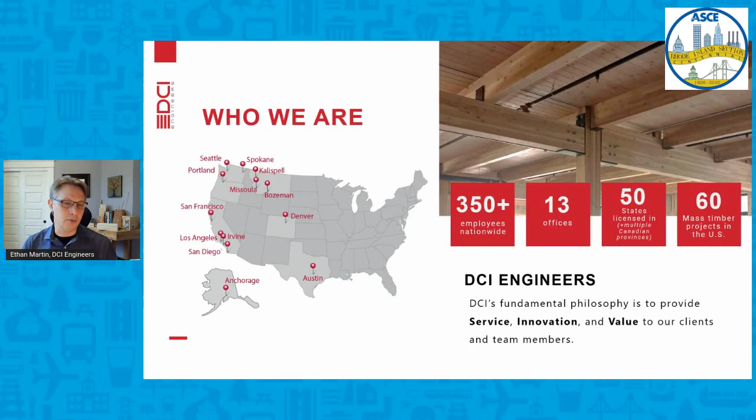All right, thanks, Jeff. As Jeff mentioned, I started a lot of wood buildings and things like that, and we'll talk on that. But right now, I am at DCI Engineers, and we're starting a mass timber division, balancing what DCI has already done over the years. We've got about 350 employees and 13 offices, mainly West Coast and Midwest. We are doing some projects in the Northeast, a project in South Korea, and we're actually doing 11 of these new tall Type 4 mass timber buildings. So we'll touch on that.

And I will apologize that this presentation, funny enough, is difficult: to cover carbon and wood, then life cycle assessment, and then the tall wood buildings. That's a lot to put in an hour. So I'm going to be running at about 100 miles an hour, but feel free to ask questions, or wait till the end to ask questions.

My background is structural engineer. I had my own company designing a lot of wood buildings, then went to work for the wood industry to promote wood construction. I come at that from a sustainability standpoint, and I'm the one that started these tall mass timber buildings. I set up a prescriptive performance-based process through the governor's office here in Oregon that had a guaranteed building permit. The idea was a developer would be incentivized because they could spend this time and effort and know they were going to get a building, not spend all this time on a prototype building and have the building department say no at the end. So the guaranteed building permit was really critical.

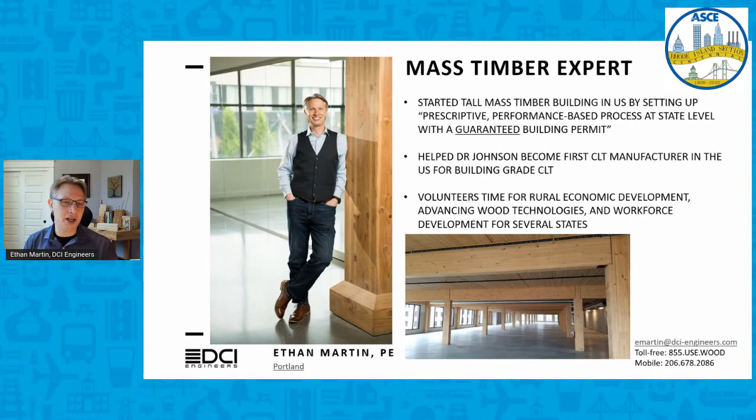And then I helped D.R. Johnson become the first manufacturer of CLT for buildings, and we'll talk about what CLT is in a minute. That was also through the governor's office. So definitely a sustainability person, definitely interested in wood and mass timber. And we're going to try and cram this all into an hour here.

The difference between mass timber and light frame construction is that mass timber maintains its internal temperature in a fire event. It's got such a large volume of timber versus surface area that it chars versus rapidly combusting like light frame construction. So it's predictable, it maintains its shape, and it's a really different animal in fire design than light frame construction.

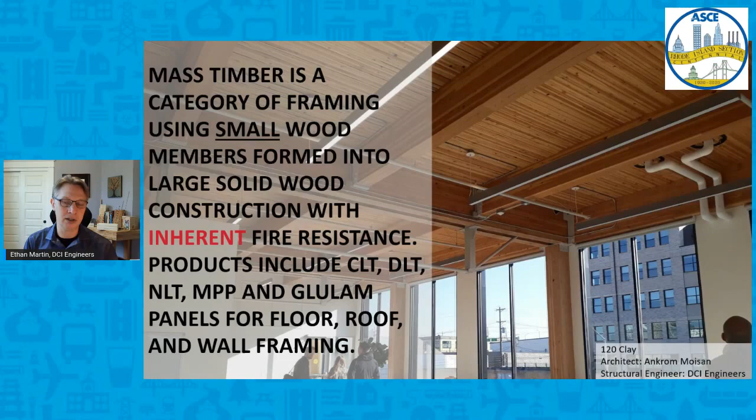We'll talk about CLT and DLT. CLT is cross-laminated timber, DLT is dowel-laminated timber, NLT is nail-laminated timber, MPP is mass plywood panels, and obviously you've seen lots of glulams also. So there's a lot of products that fall into mass timber, as long as you get that large volume of timber versus surface area that predictably chars. We'll talk about some of the sizing of that later on.

So why wood? The tree takes carbon dioxide out of the atmosphere while it takes in sunlight and pulls up nutrients and water out of the ground to form that cell, to form that lignin. 50% of that wood fiber is carbon.

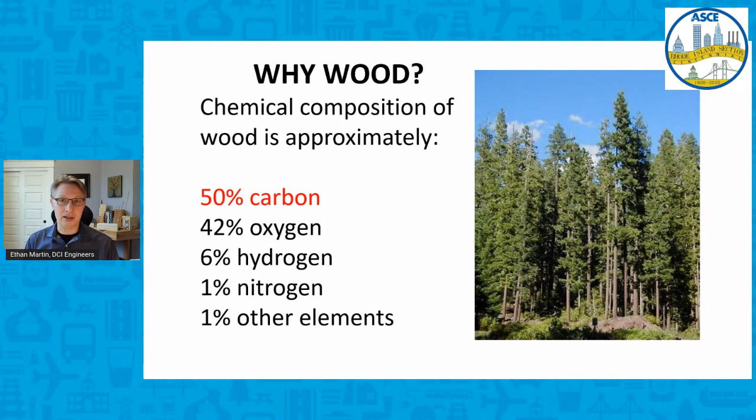So to grow that tree, it is removing carbon dioxide and taking that carbon and forming the wood cell and then releasing oxygen, O2. So wood basically is a carbon sink. And we'll talk about why some people want to look at the growth of trees being a carbon sink and

some don't. But what we've got to look at as structural engineers is that the manufacture of the building materials that go into our buildings, right now, is about 11% of our total global greenhouse gas emissions. And obviously you guys have probably seen the political stuff going on with our new president and getting back into the Paris Climate Accord agreement. And basically that's trying to minimize the temperature rise across the planet. And obviously global greenhouse gas emissions play a critical role in that.

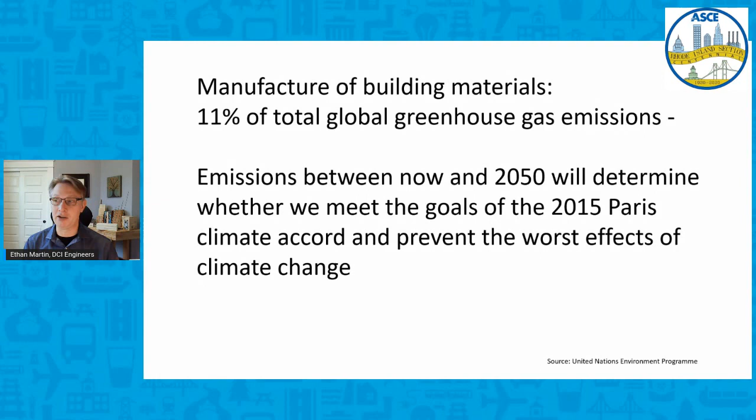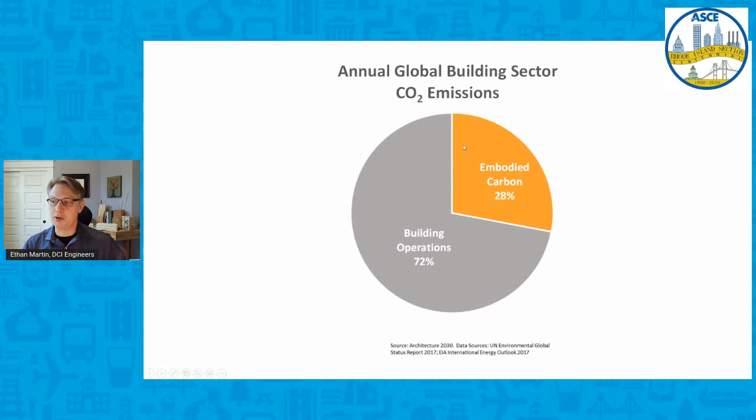So where we've been, this is a more recent chart here, basically of 2017. And really we've been focused on operational carbon. That's the AIA 2030 challenge, focused on the building operations. And so you'll see this is as of 2017. Even back in about 2014, building operations was about 84% of the carbon dioxide emissions. And so even just between 2014 and 2017, this has dropped from 84 down to 72. And thus, obviously, embodied carbon starts to play a bigger and bigger role.

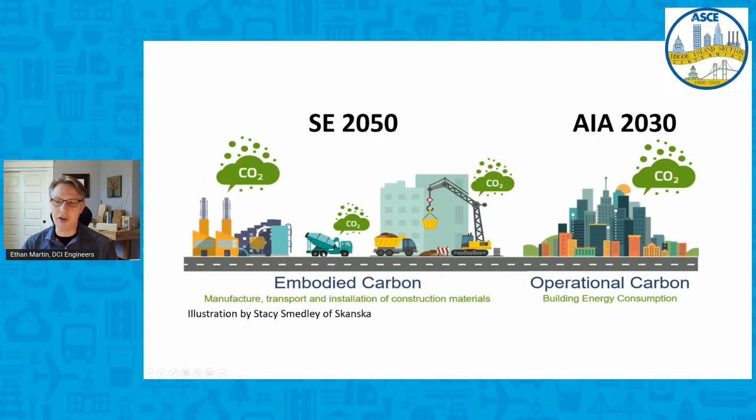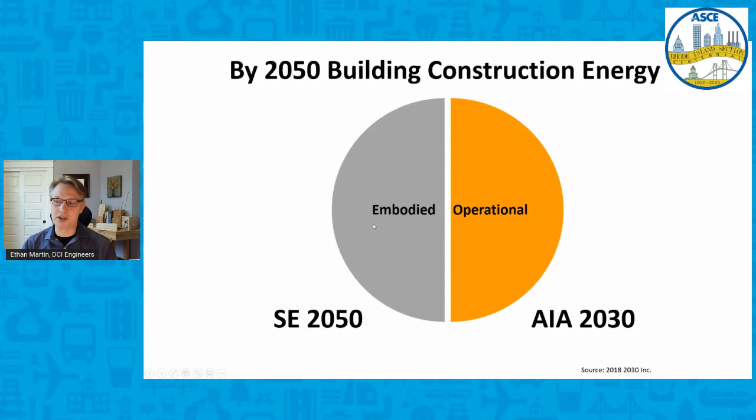So again, AIA 2030 has really been focused on the operational energy. The new SE 2050 challenge for structural engineers is really how do we reduce our embodied carbon? How do we reduce the material impact going into the building? And if we meet this challenge, the idea is by 2050, 50% of your carbon dioxide pollution will be from the operational energy, the AIA 2030, and 50% of the building carbon dioxide pollution will be from the embodied energy. That's the intention there. And so what does that mean in real life?

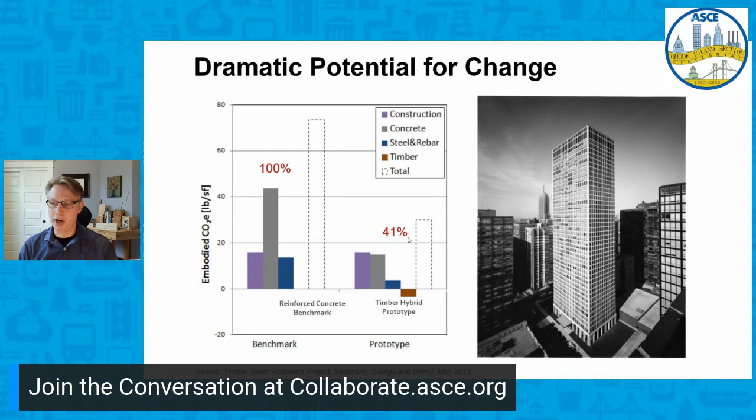And this is not even considering third-party certified wood. This is just using wood. And so the deal here is to keep an eye on this. This is 41% just using wood. You use a third-party certified wood from a managed forestry program, and this actually dropped down to about 16%. So it's a significant impact that we can make by changing building materials.

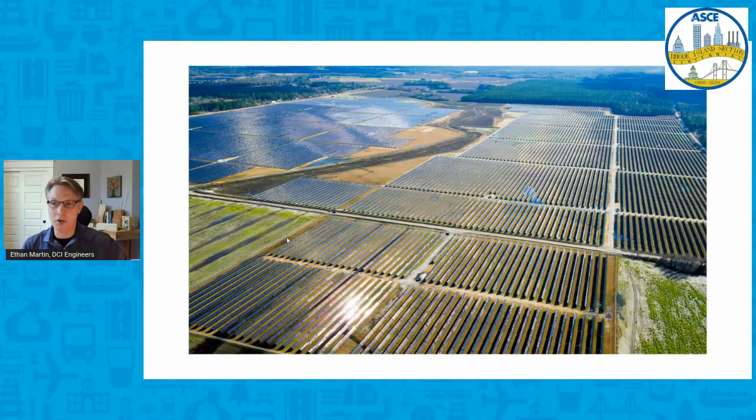We are talking about a crop where we cut down the trees, we replant the trees, and you just keep a crop rotation going, just like a farm. You grow the corn, you cut the corn down, you replant the corn, you grow the corn, you cut it down. And trees are very similar. We're just on a much larger harvesting cycle of about 50 years-ish.

And so here's some of the devastating facts that you're seeing. In North America, we're burning about 3 times more forest than we're harvesting. Our forest area, and we'll show some tables on this in a second, is increasing about 2% per year, but the volume of trees on that forest area is increasing by about 5%. And that's leading to these forest fires we're having.

And then you look at how much forest we utilize in the US, and we use less than 2% of our forest area in the US. And you look at Austria, look at Germany, they're utilizing like 35 and 45% of their forest area, a much, much higher utilization rate than we are. We're only down here at 2%. So there is no concern in North America about hurting our forests. And environmental groups get all over that, but that's not something we really need to be concerned about unless we start hitting that 45% utilization rate.

And so again, we've held steady at this number for years and years. And we have forest practices, state forest practices, tribal forest practices, federal forest practices that require mandatory regeneration. So if you cut down a tree, you've got to replant 3 trees. And I looked at the Northeast, and private forest land is about 89% across the country, and in the Northeast, it's down to about 81%.

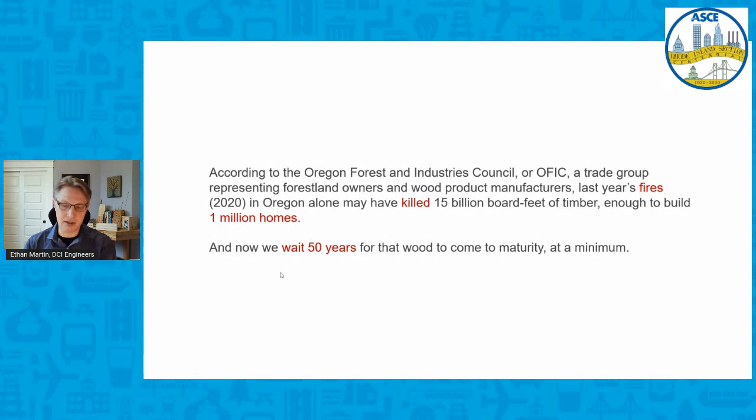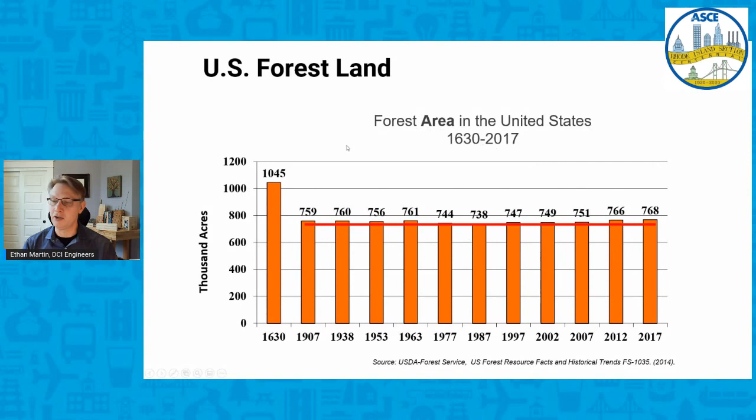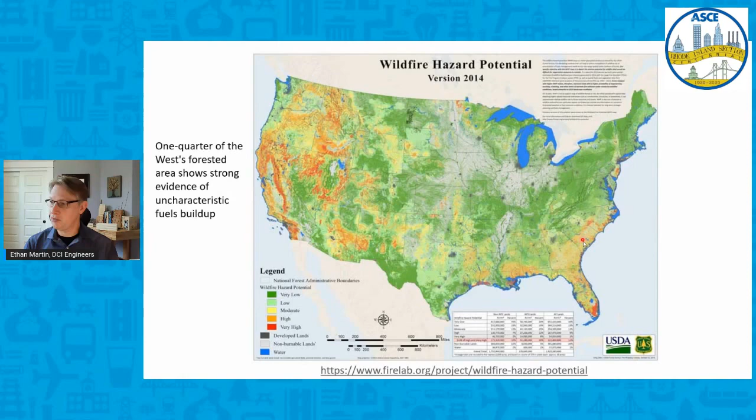But this was 2014. So we knew this was coming. They're showing here on the left-hand side of the US, all this red, fire hazard area, southern Florida fire hazard area, even some here in North Carolina, South Carolina fire hazard areas. And then here comes along 2020, and this was the map of the fires. Look at this, out of control, could not put the fires out.

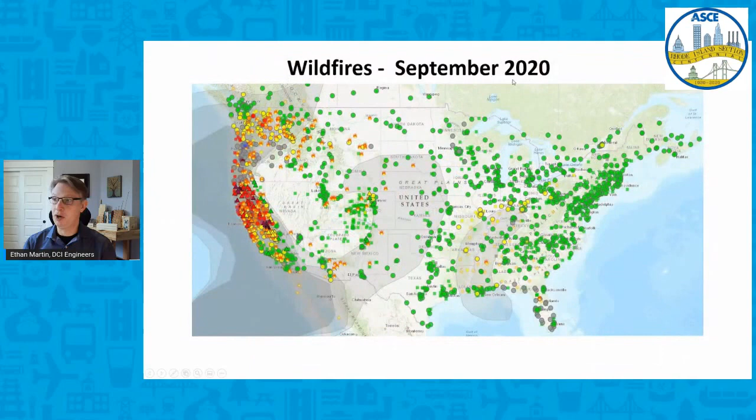A bunch of fires going on in Colorado, and also Idaho and Montana were going on, and then down in Florida. So we mapped this out. We knew this was going to happen. So that was in 2014. They warned about it. Here we are 6 years later, and it's out of control. We could not put the fires out and just had to let them burn.

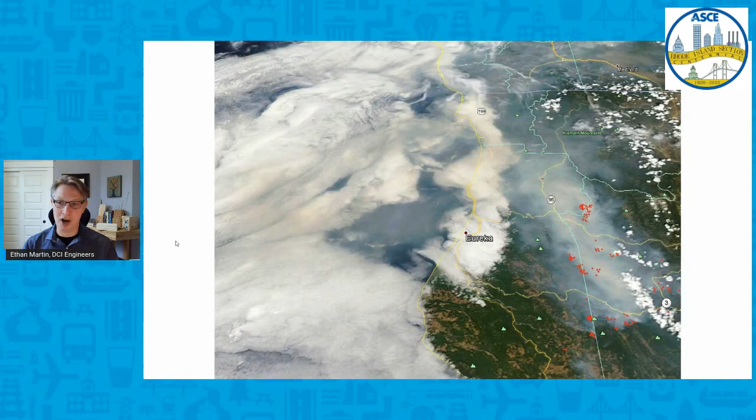And so what you're seeing here, this is not cloud cover. This is the smoke from those forest fires, all the way up from Northern California going up through Oregon here. And this literally got all the way over to France. And if you don't think that's a problem, that we're polluting the entire planet through forest fires, we've got some issues. So, I joke, but it's a problem. And it needs to be addressed.

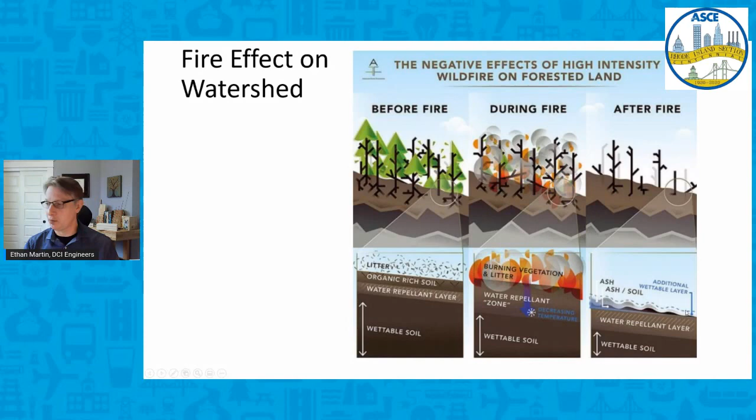And not only is it affecting our atmosphere, but it's also affecting our drinking water. Because what happens in these fires is that if it gets really, really hot, it will burn down all this organic rich soil. It'll burn down this water repellent layer. And so then when it rains, the water just grabs all the ash and everything and pours it into our reservoirs. And that actually happened in Denver.

So Denver actually was spending lots and lots of money trying to get the ash and everything out of the water supply that's feeding the city of Denver. Utah and Nevada, exact same problem. They've got forest fires going in and polluting their drinking water. So it's a little bit of everything.

And so, what's managed forestry and how does that define us in green building programs? And a lot of people, I will say, have been misled by third-party forest certification programs. And so we'll talk about that. So this is one of our East Side Washington healthy forests. And so what you see here is the trees are well spaced. Each tree is getting lots of sunlight. Each tree is able to grab a lot of water out of the soil around it, able to grab all the nutrients out of the ground around it, and it creates a really healthy tree.

If you get these dense forests, they're all fighting for nutrients. They're all fighting for sunlight, and you'll get like 20 weak trees instead of 5 healthy trees. And that's where the pine beetle is killing them, because the pine beetle won't kill a healthy tree, but the pine beetle will kill the weak trees. And that's where you're seeing the forest fires too. You got these really weak trees that have a lot of dead limbs, and that increases the fire.

So, wood is the only product that has a third-party certification system attached to it through FSC, SFI, PEFC, Canadian standards, and then ATFS, which is the American Tree Farm System.

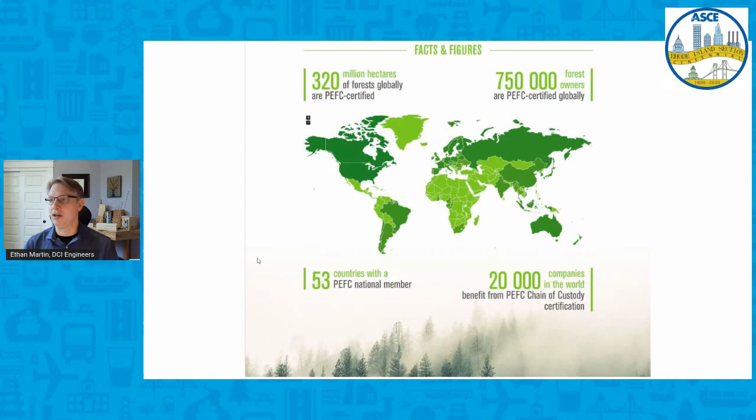And these graphs are deceiving because with these graphs, you kind of go like, wow, FSC's got all this covered. No, this is about 22%. If you actually drew this as 22%, you'd see a little blip over here that they have certified forests. So these graphs, these images they promote, are a little deceptive in that.

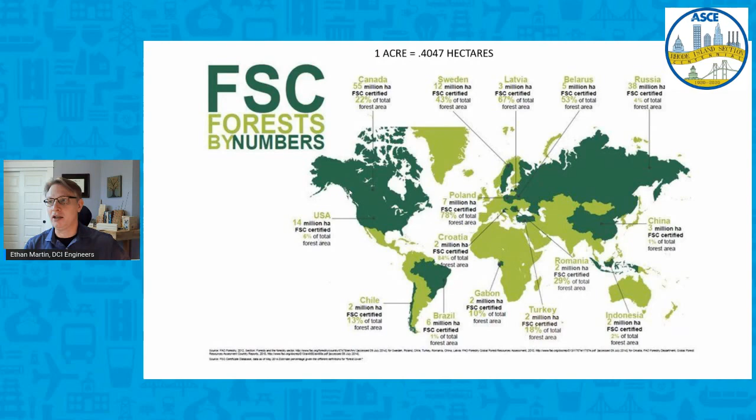And then you'll find that a lot of this is managed by state regulations, tribal regulations, US Forest Service regulations, and we don't have to be adding on the additional cost of third-party certifications to get a healthy building using healthy forests.

And so this is a forest right by my house. I hike this trail on a regular basis, and this is overgrown. But luckily, this was a low-intensity fire, so you can see the greenery is still up here at the top. Obviously, it killed all the underbrush here and the lower branches of the trees. But this is too dense. This is too many trees. They're not getting any sunlight in here. You can see, look, a little sliver of sunlight.

And so they're all fighting for water. They're all fighting for sunlight. They're all fighting for nutrients. And this is what happens. These fires get out of control. They hit about 3,000 degrees. And at 3,000 degrees, that's when you burn all the nutrients out of here.

And when you burn those nutrients, you saw me say earlier it'll take about 50 years for this forest to come back. If these out of control forest fires hit that 3,000 degree mark, they burn the nutrients in the soil and then nothing grows back. Even if you went in here and planted trees, they would not grow because you've now cooked all the nutrients out of the soil. So the point here in mass timber is, how do we thin these forests? It's not about clear cutting. It's about how do we go thin these forests.

And so this is Vaagen Timbers up in Washington. And basically what we're doing here is small diameter, 6-inch, 8-inch diameter logs. So we're not talking old growth. We're not cutting down the 3-foot diameter trees. We're not even cutting down 18-inch diameter trees. We're thinning these forests out.

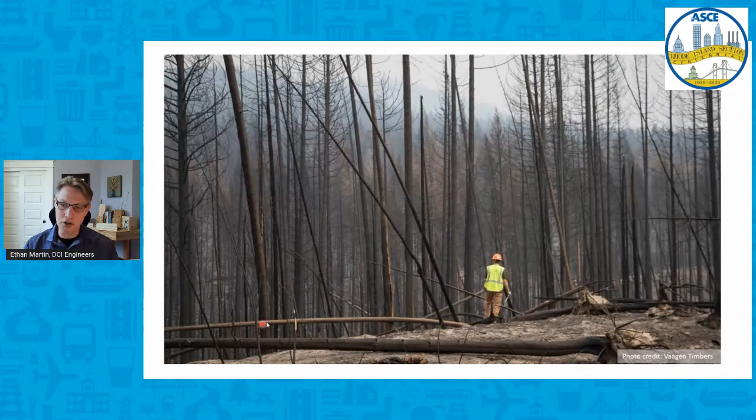We're taking the small diameter, 6-inch, 8-inch diameter, thinning the forest out to let this tree keep growing, let this tree become healthy, strong, get all the nutrients, thin this tree away, hopefully before the forest fire. And make this into boards, make it into a product.

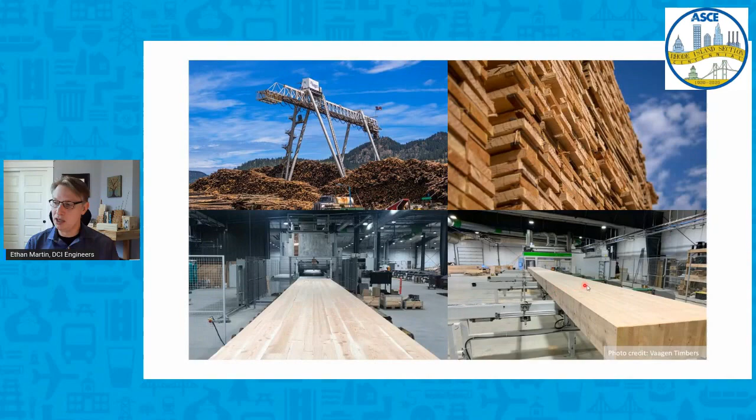So what you're seeing here is a cross-laminated timber panel made at Vaagen Timbers. So taking that small diameter, putting the boards in there. Here's a glulam they made up, again, small diameter, but taking that small diameter and making large format mass timber products. Or again, we can just keep burning it. And again, that to me is out of control. That should not be happening. We've got a problem that needs to be fixed.

There's San Francisco on fire. Here's one of our projects right up against a fire in Oregon. And so this is where I'm going, like, stop burning the trees and start manufacturing mass timber products and put them in a building. So these are glulam columns and glulam beams and CLT floor plates going in there.

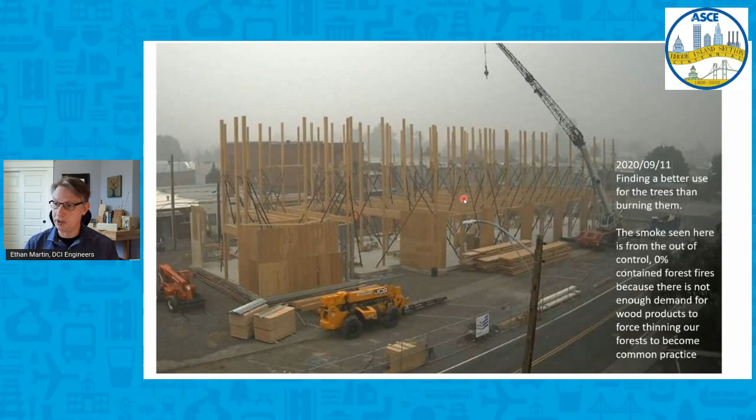So how do you start doing that as an engineer? This is a service we can provide to architects. Architects are doing it also. But life cycle assessment is a process to study and tabulate the environmental impact of the materials you choose. So you have to define, okay, how do we want to measure this? Do I want to measure this from cradle to gate or cradle to grave?

What do we want to count? Do you just want to count the beams and columns, or do you want to count the beams, columns, hardware, expansion anchors, whatever it is? And then you've got to pull all the data for that, stuff it all in an Excel spreadsheet or whatever you want to do, and then report out your results.

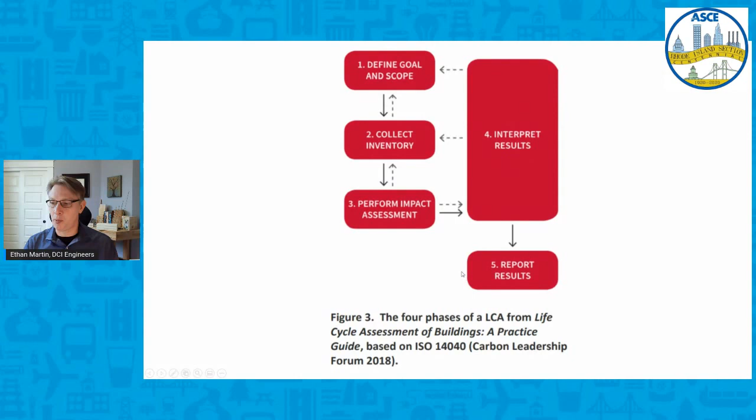And so cradle to gate, A1 to A3, is really getting this material out of the forest, transporting it, manufacturing it into a product. A4 to A5 is the construction process. So, okay, I've got these glulams made up. Now I'm putting the glulams in the building, and it sits there and it lives its life.

In the B1 through B7, there might be some repair replacement, but the big chunk of your LCA is typically going to be in this A1 to A5 stage. A lot of people do A1 to A3 and kind of stop from the product getting manufactured. I do argue that you definitely should take it to the A4, A5 because this transportation can play a huge role in this. And so I'd recommend at least do an A1 to A5 in here. B1 to B7 repair maintenance is there, but it's not a very big thing.

And then the end of life. What are we going to do with these products after the building gets torn down? A lot of people are like, oh, I need a building that lasts 100 years. You can pull up the data on this. The average lifespan of a building in the United States is about 28 years. The use changes. A new tenant comes in.

How many of you guys had laptops when you were in school? I didn't have a laptop when I was in school. Now everybody's got a laptop, and they need an electrical outlet at every single table, every 2 chairs. And so the use changes, and that's why people tend to tear the buildings down, because the use of the building changes, and they just can't utilize the structure anymore.

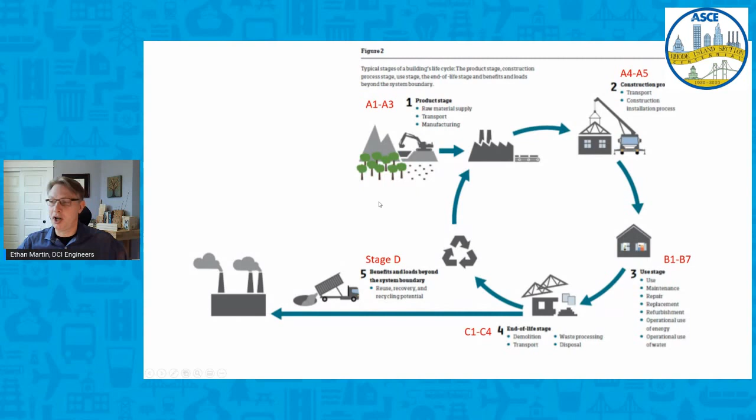And so a lot of people say, whoa, where's all this data for end of life of mass timber buildings? We don't have enough mass timber buildings to actually have developed a company that specializes in this demolition. So are we looking at deconstructibility? Yes. Can these mass timber commercial buildings then become, say, a residential building? Yes. Can it go into a shredding process and become toilet paper? Yes. Or can you just dump it in a landfill, which is not what we want to do. But that's the process. We look at the whole life cycle of the products that are going in there.

And there's easy ways to do it. You can do an Excel spreadsheet on your own as an engineer and get some EPDs. The EPD is an environmental product declaration that has a bunch of information, and we'll show you some of that. You can go super simple. Tally is a plugin for Revit. This is something we're using at DCI: basically we're building our model in Revit, and this Tally plugin actually creates the LCA for us and then spits out all the results for us.

Athena Sustainable Materials Institute has several programs of a whole building analysis. So you can literally put in there, hey, I'm doing a 6-story building, what's my environmental footprint? You can also go, okay, I'm going to put in the major components, and it'll give you an environmental footprint. Or some of them is like, I want every single item that's going into the building, and it'll give you an environmental footprint. But again, that goes back to, at the beginning, you've got to define your boundary. How much do you want to measure?

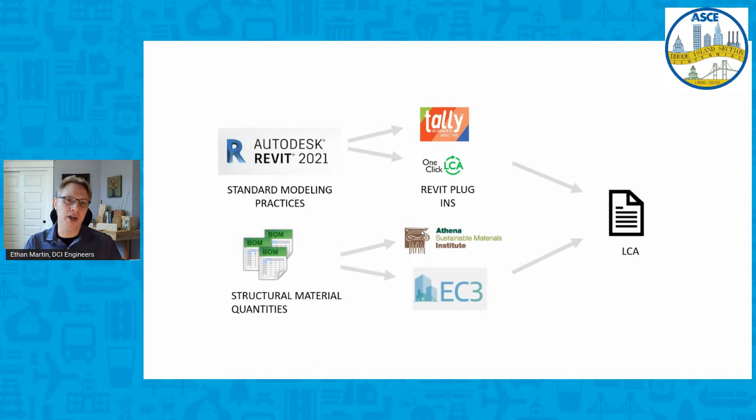And with that comes a fee. As structural engineers, what's our fee for that? If you got a client that says, look, I just want the pat on the back, I want to feel good, there are definitely some black boxy programs where you can literally just put in there, I'm doing a 6-story building, I'm using wood, and it'll spit out an answer for you. And then obviously there's the Tally plugin that's measuring every single item that we're putting in that Revit model. And our fee on some of those projects might be $60,000. There are clients that want to measure the environmental footprint from the manufacture of the product all the way through to the building's constructed, with a future plan for deconstructibility. We do have clients asking for that.

So there's a little carbon dioxide pollution to plant, but then you've grown this tree from anywhere from 30 to 100 years. I would say usually the average is about 50 years, at least on the West Coast. And it's sucking the carbon dioxide out of the atmosphere, storing it in the wood cells, and then you've got to go make a product. So you go make a product, and then you put it in a building for its life cycle, and then it's like, what do you do?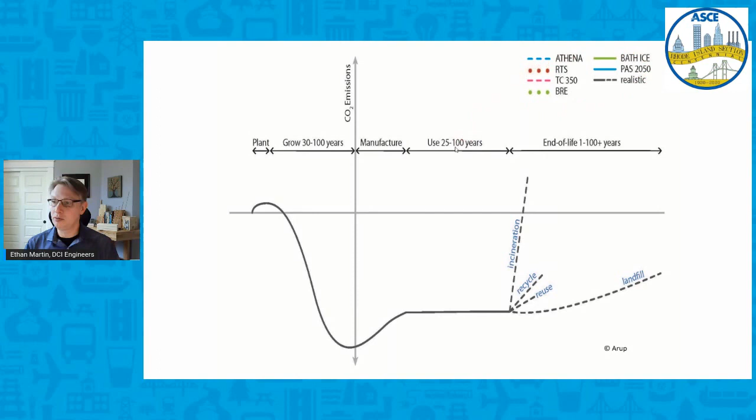If you just incinerate it, even if you put it in the landfill, this will eventually come back up to zero here, or can you recycle and reuse? So this is wood, and there's a bunch of programs to model the environmental footprint, but here's my note of caution. Some programs do not account for this growth and the sequestering of carbon, and some do.

And so again, if you don't take into account this growth here, then wood's going to have to manufacture the product and have it in a building. It's going to have a positive impact on the environment. I will still argue, if you actually overlaid concrete on here, concrete's going to be way up here. Steel's probably going to be right around here somewhere. So you're still better off, but you'll still get a better bang for your buck if you take into account the sequestration of the carbon dioxide out of the atmosphere when the tree is growing.

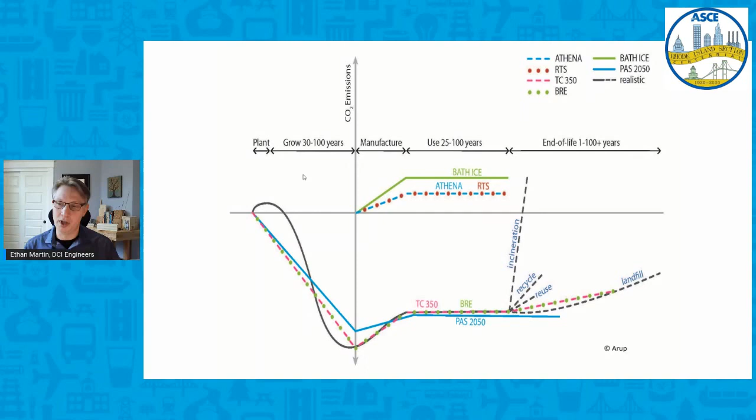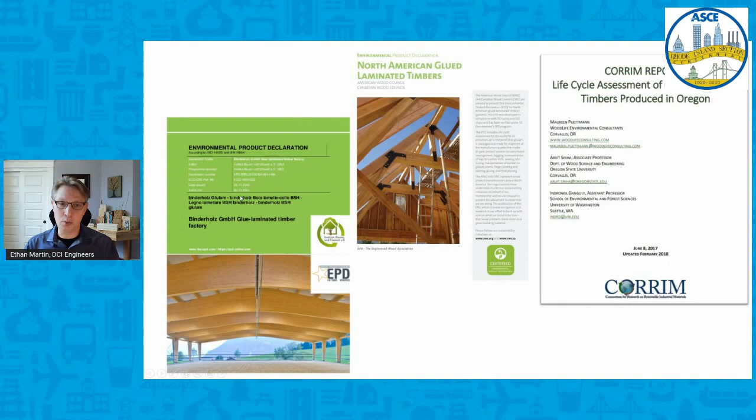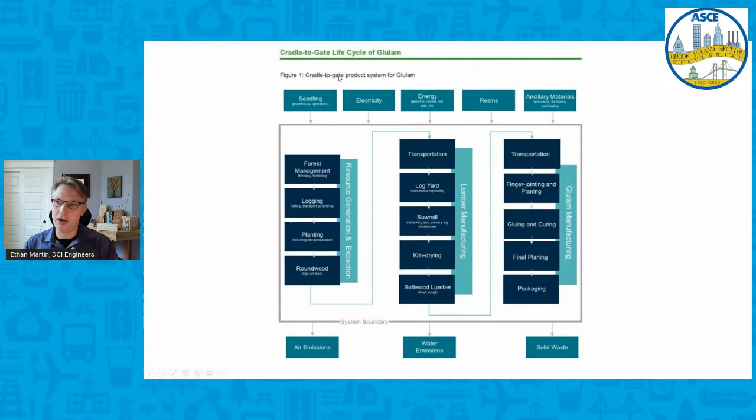So what's an EPD? The EPD is the Environmental Product Declaration. There's a lot of people making these. And basically, it's a documentation of the environmental impacts to make their product. So here's one for glue laminated timber. Here's one we did for cross laminated timber with CORRIM and University of Washington and Oregon State University. And basically, what it does is it says, okay, cradle to gate. Cradle to gate is, again, making the product in the forest to manufacturing the product as it's sitting there in the manufacturer's facility, not to the site.

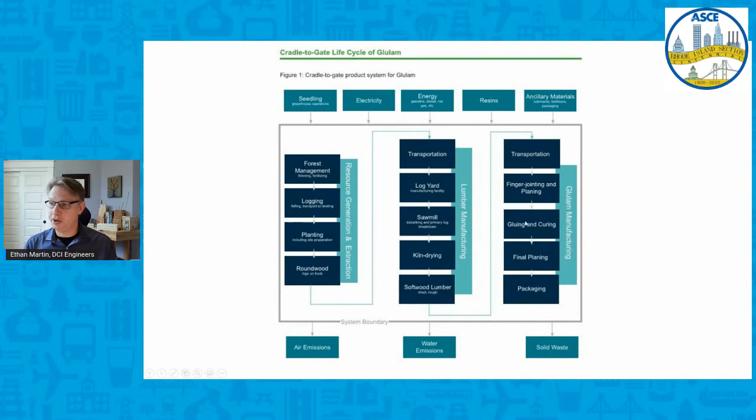But here's the deal. It's like, okay, what did it take to go manage that forest? You had people driving out there, you had logging operations, you had planting operations, then you had to go get the tree out of the forest, you transported it to a mill, the mill cut it up, they had to dry it. They then made a product out of it, they finger jointed it, they glued it, and then it's sitting in the shop at the end. And so this is what the EPD is doing.

And in that process, it is measuring things. It's measuring global warming potential, acidification potential, eutrophication potential. So this is like air quality. This is stream quality. This is acid rain quality. This is carbon pollution in the atmosphere. And so they have all these different things.

And so what you can do with your EPDs, you can say, okay, well, I've got 40 million linear feet of glulam, 40 million linear feet times this number, times this number, times this number. And then I've got 10 steel beams, and 10 steel beams times this number times this number. So you'd be using this one for glulam, you'd be using the steel beam one for the steel beams.

The only downside to EPDs right now is they are governed by the industry that manufactures the product. So the wood industry determines what they want to include in their EPDs. The steel industry decides what they want to include in their steel EPDs. And so you're not going to get a 100% apples to apples comparison, because you might find out the steel industry does not take into account non-renewable materials, where the wood industry does.

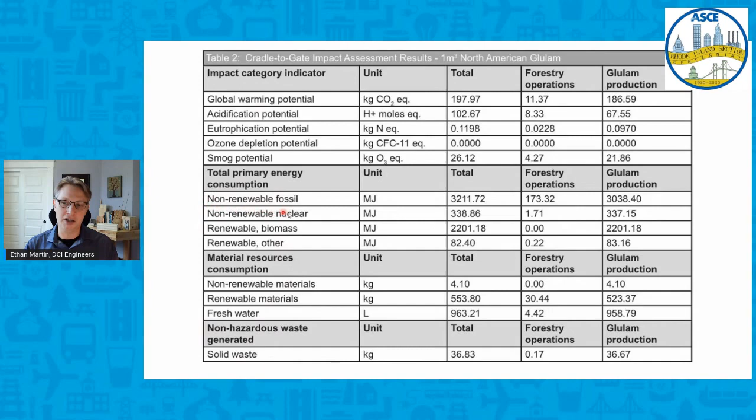You'll find the first 5 here that the steel industry, concrete industry, wood industry do have information on. But on this other stuff, you may not be able to do an apples to apples comparison, because that industry may have decided not to measure something. So that's the only downside to the EPDs.

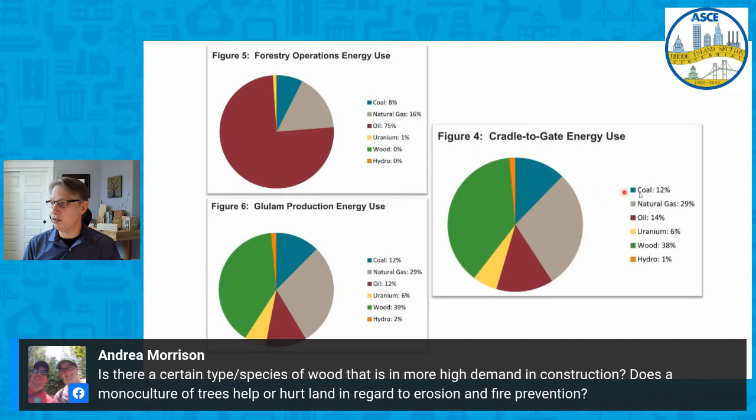But again, it's creating this database here of, okay, what did it take in forest operations? What did it take to make the product? And then here's the total EPD, cradle to gate. What is all the environmental impact that went into that product to make it?

And so, as I touched on, not every project has the budget for a full scale whole building LCA. Again, there's people that just want a pat on the back. There are programs out there you can buy that can actually help you do a whole building LCA, but not every project has that budget. And that's definitely something to discuss with your client.

And then I fully argue that specifying responsibly managed wood is a much more effective system versus proprietary third-party certified wood. And don't get me wrong, these guys are doing a great job in areas like South America or Russia that are going through their kind of industrial revolution on the forestry side of things. In North America, my personal opinion is that it's just adding costs to the project, and it's not actually doing what you think it's doing.

Specifying FSC is probably not doing what you think it's doing. FSC cannot be applied to a thinning of a forest. So again, I talked about this thinning and getting that small diameter fuel load out of the forest so we can reduce these forest fires, and you can't get a thin forest FSC certification. So everybody thinks FSC is the bomb on forestry certification, and it doesn't apply in certain situations.

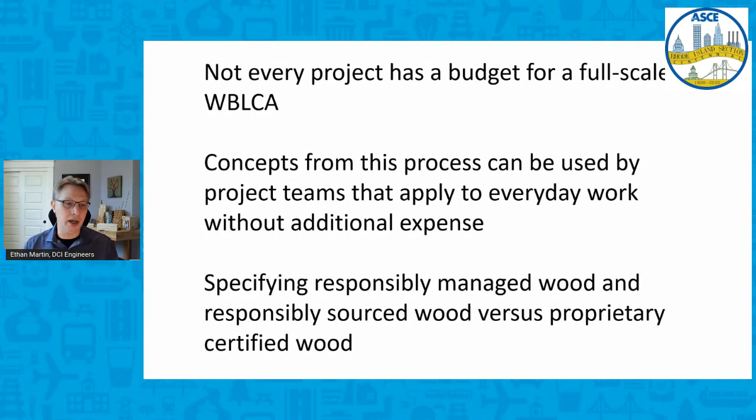So then tall buildings. Yeah, so now we're going to jump into tall buildings, but there is a question on species. So Chad, what's the question? Let's see. Is there a certain type species of wood that is in more high demand in construction? Does a monoculture of trees help or hurt land in regard to erosion and fire prevention? So it's almost 2 questions there.

So the beauty of the wood industry is they have a lot of performance specifications. And what that allows each region of the country to do is utilize the species that's more prevalent in your area. And so that's, I think, a benefit. So here in the Northwest, say Washington. Washington is a bunch of spruce pine fir, so we're using spruce pine fir a lot. Oregon has a lot of Douglas fir, so we use a lot of Douglas fir out of the Oregon region.

Southeast, you got the southern yellow pine, and that stuff grows like weeds. So use the southern yellow pine. There's no point in shipping southern yellow pine all the way to the Pacific Northwest, because again, that trucking will destroy your environmental footprint. So no. The beauty of the wood industry is that there isn't one species that is in more high demand in construction. The stronger woods, the Douglas fir, the spruce pine fir, the southern yellow pine, I will say are the most common for glulams and for the heavy timber members.

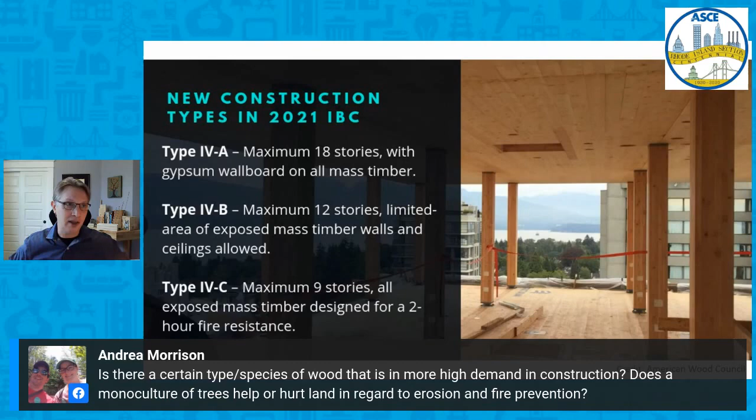You go into a forest out here that has been planted with, say, spruce pine fir, you'll actually get in there and there's Doug fir interspersed in there. There's deciduous trees interspersed in there. And you'll find that people say we have a monoculture out here, but in reality, we don't. But you will definitely find a monoculture in plantation kind of forestry. Okay. So with that, if that answers those, we will get on with the tall buildings.

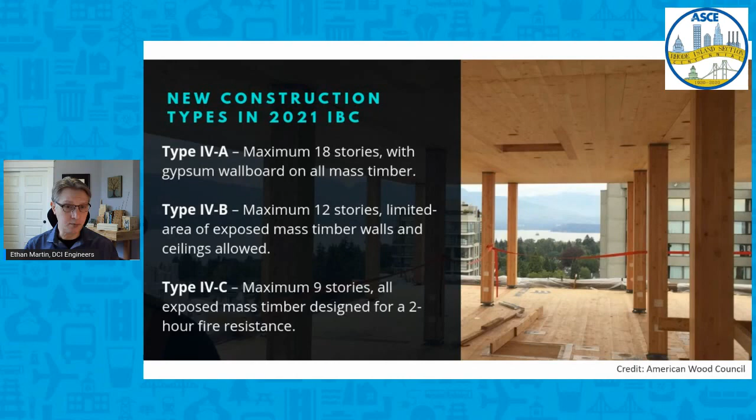So the tall buildings, if you've not seen this, there are new construction types in the 2021 IBC. And what they did is they basically said, let's add 3 new construction types. Let's not adjust anything. Let's not change anything. So we've had that type 4 in there. There's now type 4A, type 4B, and type 4C. And basically type 4A is 18 stories, all encapsulated. You won't see the wood.

This is based on Brock Commons in British Columbia. And this is Framework. So this is the building that I got permitted here in Oregon, Framework here in Portland. So they're modeled after prototype buildings. So this is Brock Commons in British Columbia, the 18-story building. This is Framework here in Portland, Oregon, the 12-story building. And this is Carbon 12 here in Portland, and it's 8 stories of residential.

So the difference between these is the 18 stories, you won't be able to see any of the mass timber. Smoke is what kills people in fires. So you're going this tall, it's life safety, you want to get the occupants out of there. And so you're covering up all the wood because even though it chars and it's predictable and it maintains its shape, it still produces a lot of smoke, and smoke kills people.

So the 12 stories then has some allowances. You can have 20% of the ceiling exposed, or you can have 40% of the walls exposed, or you can do a combination of that. And you guys on the East Coast are lucky because in high seismic, we won't have mass timber walls. There's no ductility, no energy absorption for the high earthquakes. And so we, funny enough, won't have a lot of walls in our mass timber buildings on the West Coast because we can't absorb that much seismic energy.

Whereas with wind energy, the wind just leans the building over and it comes back, remains elastic. And so you guys will be lucky because you'll have walls and roofs. And so you can have the 20% of ceilings, 40% of walls, or a combination of that, X over 20 plus X over 40 as the combo, less than a unity equation of 1. Or you can do this type 4C, which is all exposed. All this mass timber can be exposed, but you're still limited to 85 feet.

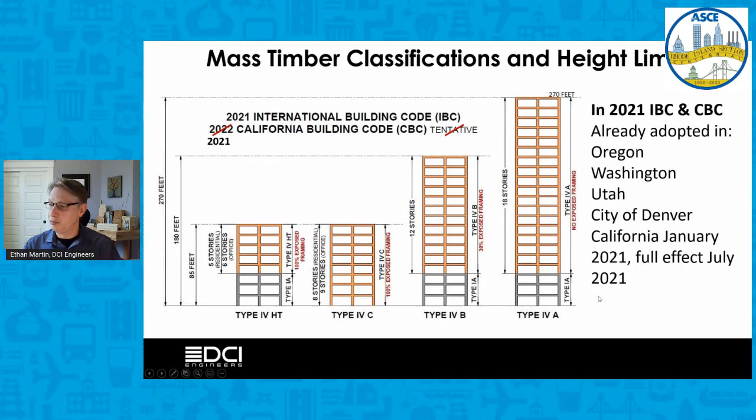And so again, since I worked on these buildings here in Oregon, I got this adopted early in Oregon code-wise in 2015, got it adopted in Washington in 2015 also. Utah followed suit in, I think, 2017. City of Denver got this adopted in 2019. And then California, it's already gone into effect. We're already permitting 2 of these buildings in San Francisco right now, using this new code in California.

And so this is just the breakdown of it. For these occupancies, 270 feet, 180 feet, 85 feet, the number of stories associated with the different occupancies, and the allowable area per floor. So it's pretty good. The only caveat I will toss out is that at 120 feet, you have to use the high-rise sprinkler requirements. In steel and concrete buildings, that doesn't kick in until about 400 feet. In these mass timber buildings, the high-rise sprinkler requirements kick in at 120 feet. So if you get over 120 feet in 4B, you've got to use the Chapter 4 high-rise sprinkler requirements. In 4A, you're definitely going to be using the high-rise sprinkler requirements for any building over 120.

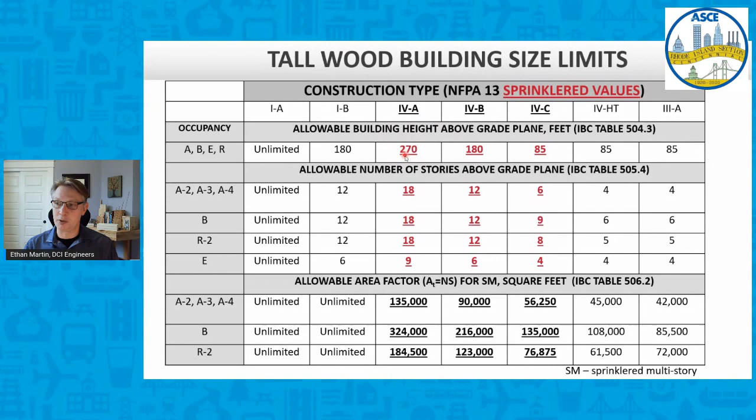And so again, this is just for you. A lot of building officials will ask, hey, how do I do these char rate calculations? These new building types have 2-hour ratings. And the IBC only allows us to calculate 1-hour fire ratings. So everybody's like, well, how do I get the 2-hour fire ratings if the IBC only lets us do 1-hour fire ratings? So here's the code path. 703.3 says you can do several methods for fire calculations per 722. 722.1 refers to the NDS, and NDS Chapter 16 has char rate calculations for up to 2 hours.

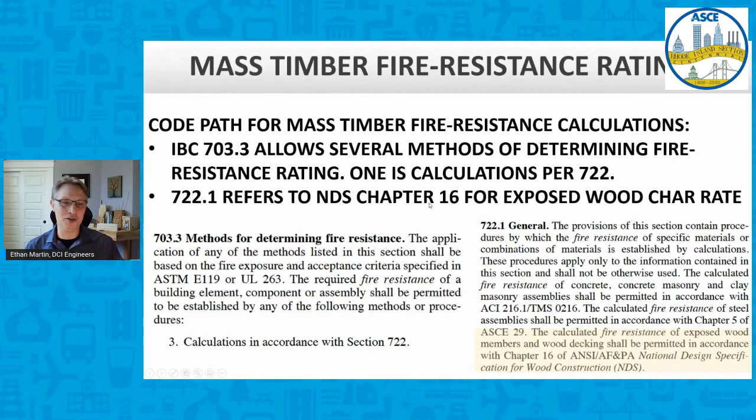So it's a process. If you've got a building official that's giving you any grief on that, this is the process. You go to 703.3, 703.3 references 722, 722 references the NDS, and Chapter 16 of the NDS allows you to do 2-hour char rate calculations. So not super straightforward, but it is what it is.

And so on these tall mass timber buildings where we've got 2-hour ratings, wood fiber costs money. It's not free. If you're going to need a 2-hour rating and it chars at 1.5 inches per hour, you've got to buy 3 inches of wood fiber to be the exposed mass timber and be your fire rating. And that's a lot of money to spend just to do the fire protection. So non-combustible gypsum protection can provide a lot of rating. Obviously, you won't see the wood. And there are definitely architects who are like, I've got to see the wood.

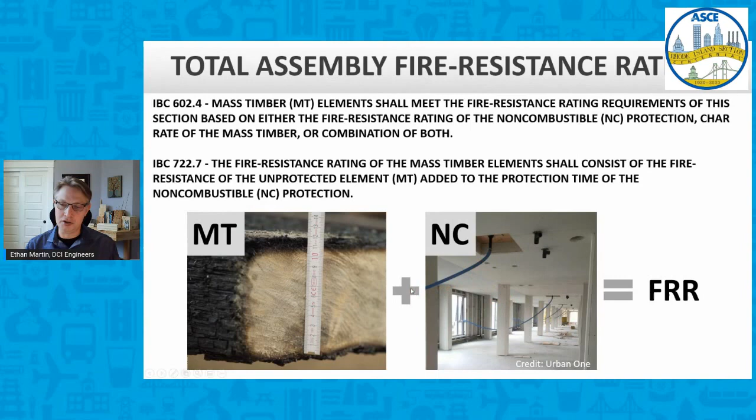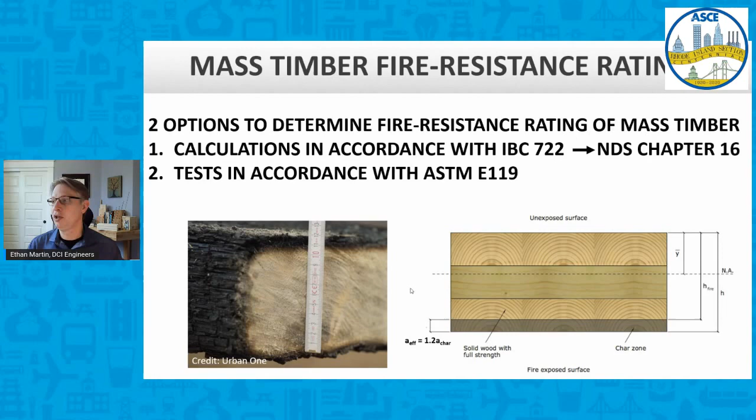That's what I want. But we do have projects where we are encapsulating, say, the floor plates and leaving the beams exposed, or encapsulating the beams and leaving the floor exposed, trying to do the yin and yang of, okay, let's spend some money on gypsum and some money on wood fiber. It doesn't have to be all exposed or all encapsulated. You can do a little bit of both. But the beauty is it's predictable. It's 1.5 inches per hour. Again, the NDS covers this for you and has char rate calculations and everything.

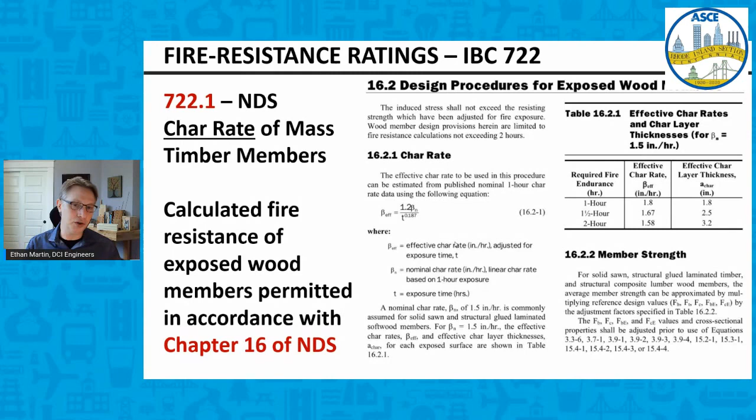The one thing for structural engineers to be aware of: a char is at 1.5 inches per hour, but there's a 0.3 inch heat affected zone in front of that char. And you need to make sure your connections stay out of that 0.3 inch heat affected zone. If you've got a steel screw in that 0.3 heat affected zone, the steel screw will actually absorb heat and start charring from the screw inside out, and you'll lose your connection. So you definitely need to be aware of that.

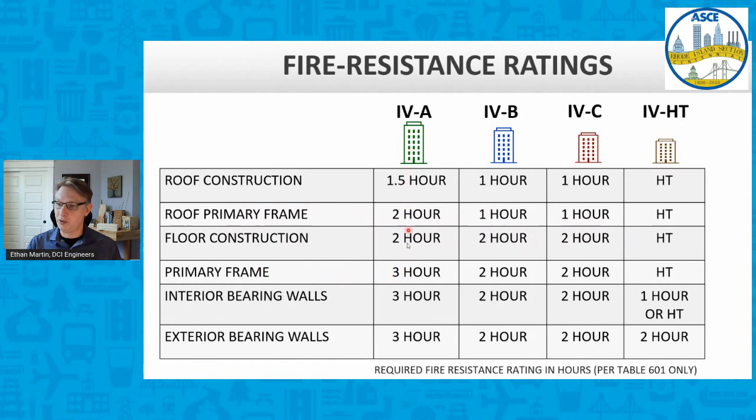And so again, there are now some prescriptive tables in the code, which is nice. That basically says, okay, you want to do a 4B building, you need to have 1 layer of gypsum on there for 40 minutes, 5/8 inch type X. This is how you get there. So instead of you having to go to another table, there used to be some tables in the code that you would have to go to get to this.

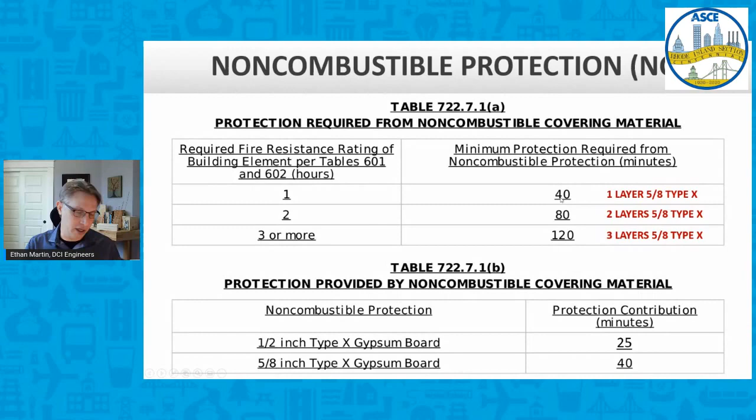Now they've actually just created a table saying, okay, if you want to get a 1 hour rating, you can put 1 layer of 5/8 inch type X on it and then do the rest out of the char calculation. So this will get you 40 minutes. You do the next 20 minutes doing the char calculation of the heavy timber. And this is kind of what this looks like.

So primary frames, they have a 4A building. It's 3 hours. And it's like, okay, well, what do I want to do? Do I want to slap on 3 layers of 5/8 inch type X to get me 120 minutes? So that's only 2 hours. Then get the 1 hour char rate calculation. Do I slap on 4 layers of 5/8 inch type X? And then I only need 20 minutes of char. So there's different ways of going about this.

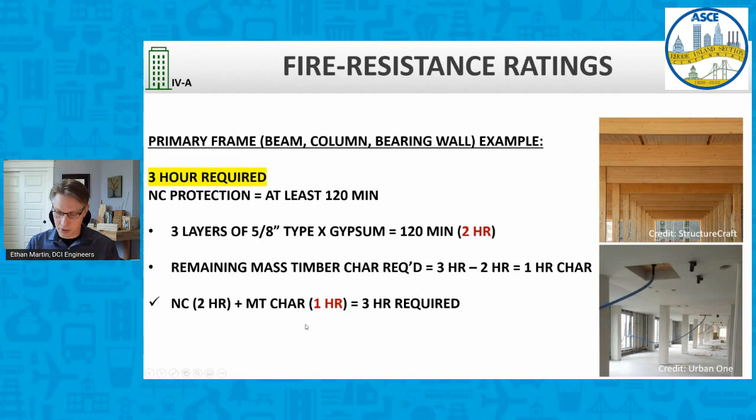Same thing here on a 2 hour, say a floor ceiling assembly in 2 hour in 4A and 4B. Again, you can just slap on 2 layers of 5/8 inch type X and get 1.33 hours, and then char the mass timber for 0.67. Or you can slap on 3 layers of 5/8 inch type X, get your 120 minutes out of it, and do 0. And you don't need any extra wood fiber from the mass timber, which obviously wood fiber costs money.

Oh yeah, so here's the fun part. So say you've got a column in one of these mass timber buildings, and you slap on the 3 layers of 5/8 inch type X, and you're like, woohoo! I don't need any char rate out of the mass timber, and I can get a 4x4 wood column to calc. Well, no. You need a minimum section size to maintain that internal temperature and to ensure the member chars. So even if you put the 3 layers of gypsum on it and you only needed a 4x4 by calculations,

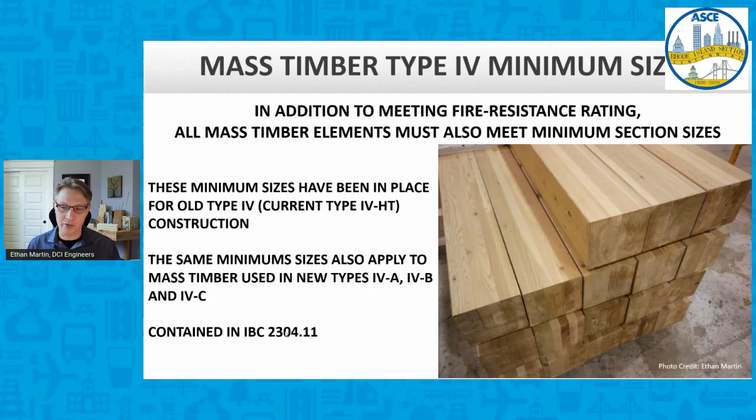you still, whoops, where did it go there? Gosh darn it, what is it doing? Sorry, my slide thing's jumping all over the place.

You still have to meet the code minimum section size to be considered a piece of heavy timber. So that's where we as structural engineers have to be involved with the architect and the contractor early on, because you might say, oh, well, let's just slap on the 3 layers of gypsum. We don't have to worry about any char rate. I only need a 4x4 column.

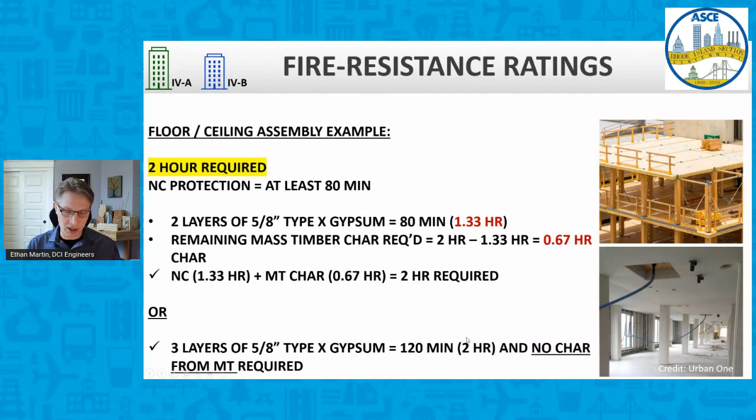So now it's talking to the contractor: we said 3 layers of gypsum with no char, but we actually already have to have char per the minimum section size. Why don't we just use 2 layers of gypsum and take the char, because we don't need the rest of this wood member for structural reasons. So again, it's a conversation. That's why you actually need to be a bit more involved in these projects.

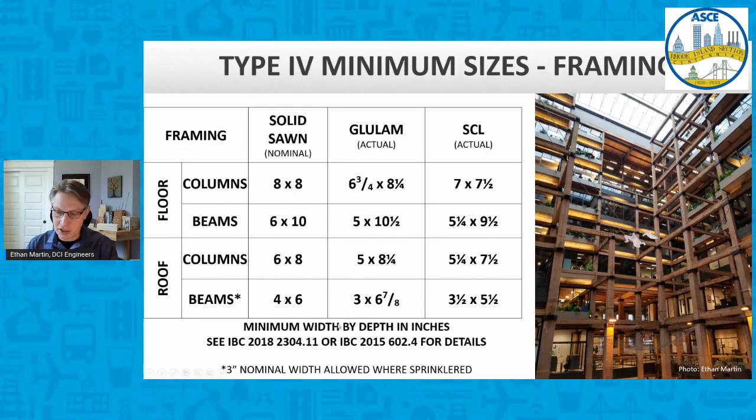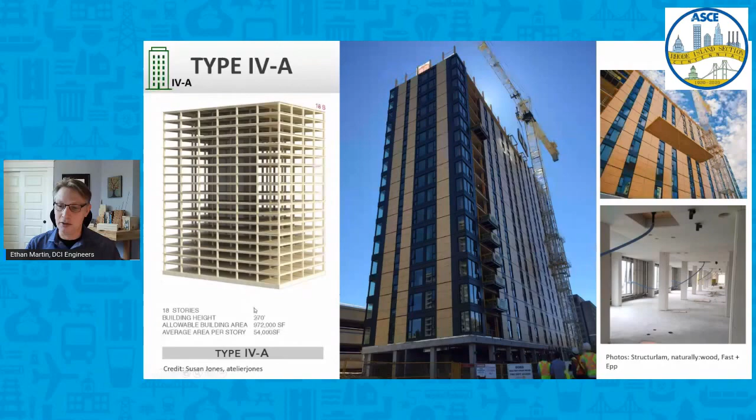So one of the reasons why we're going after this mass timber is that speed of construction. And I've not had a contractor, out of the 30-something contractors I've worked with, that has estimated that properly. It's just amazing how fast this goes. And that speed of construction, you got your tenants in there occupying the building. They're paying back the developer, return on investment kind of thing. So there's a whole bunch of hidden benefits with that. But so this is it, 270 feet, 18 stories of mass timber allowed. But again, you won't see any of the mass timber. This will be all encapsulated.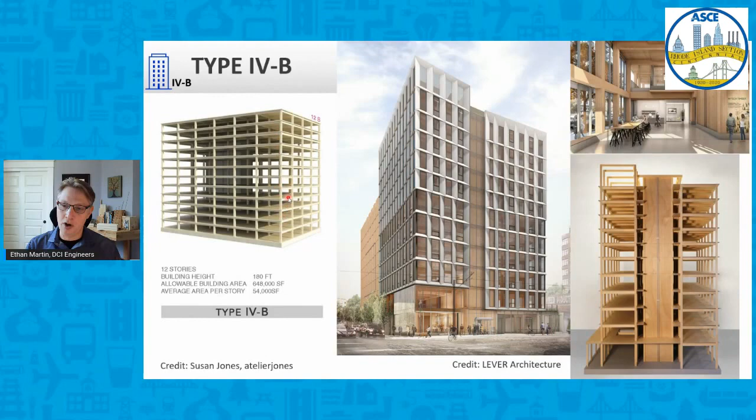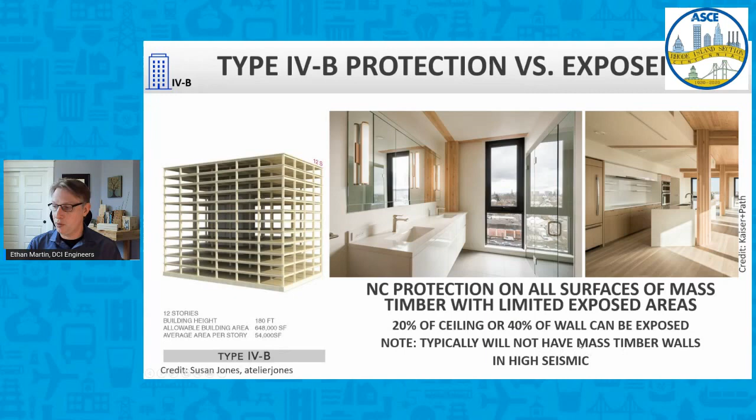But so 12 stories, again, 20% of the ceiling can be exposed, 40% of the walls can be exposed in there. And again, you can also do the unity equation. So if you want some of the ceiling exposed and some of the wall exposed, it's x/20 + x/40 < 1.0 as a unity equation. And again, we really won't have walls in our high seismic area on the West Coast here. The thing to be aware of in type 4B is if you've got a column that's on the exterior wall of a CLT wall, that is considered integral. And that goes towards the calculation of your 40%.

And what cracks me up is this is still being worked out at the code level. I went to the code council and I was asking some questions. I'm like, can we leave all these beams exposed and then just encapsulate the floor? Because the beam is really not integral to the floor if this floor is encapsulated. And they're like, yeah, that's exactly what we thought. And then about 3 months later, they called me back and they're like, nope, actually, that wasn't what we meant. We got to retract our statement. And so the code's been developed, but there still are some gaps and some misunderstandings happening out there. And so what they decided was that if the beam supports the floor, then it's integral. And I was kind of like, well, when would a beam not support a floor?

So there's some code language in there. But basically what they've said now is that this beam and this floor counts towards your 20%. And what I will caution is this surface area on a beam on 3 sides adds up really quickly to 20%. And so we've got projects where we're encapsulating the floor system and getting our 20% just out of the beams. And we have projects where we're encapsulating the beam and leaving the mass timber floor plate exposed. But the beauty here is this interior column then is not integral, because it's not attached to a wall with CLT or MPP or whatever it is. And so all your interior columns can be exposed.

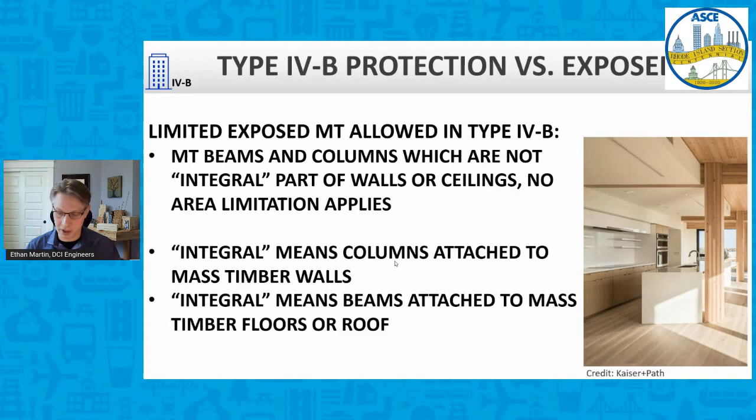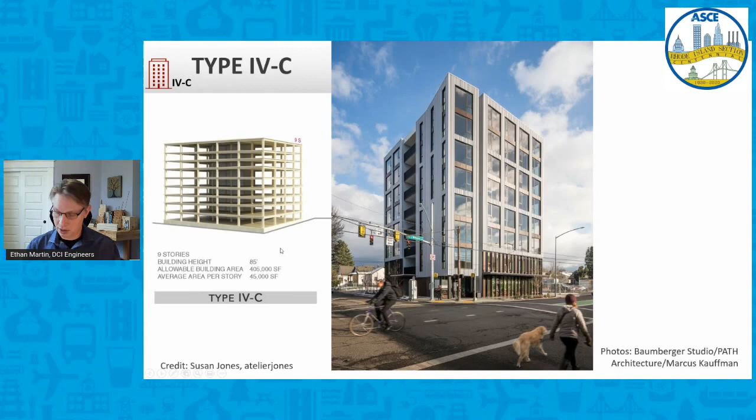Yep, so that's what we talked about already. And then 4C, again, it's based on Carbon 12 here in Portland, all exposed. Again, the downside: funny enough, this building's 108 feet high, but through the code hearing process at the ICC level, they only let this go to 85 feet. But the beauty is everything can be exposed. Your columns, your beams, your floor plate, everything can be exposed in there.

But again, 85 feet. And so one of the reasons why people didn't pick type 4 back in the old code was you weren't allowed to have any concealed spaces. And the reason behind that is if in this cavity you had enough oxygen in here and you dropped a ceiling in here and say you had a piece of conduit that was shorting out, you'd never see it. And again, the mass timber chars versus combusting and catching on fire.

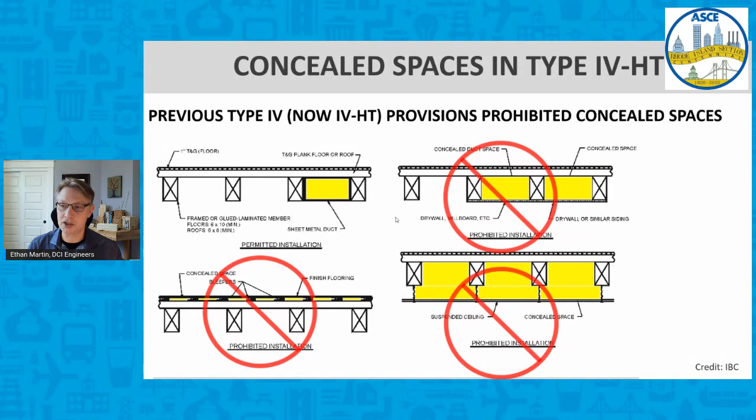So if you had an electrical conduit in here that was shorting out, it would smoke and smoke and smoke and never catch on fire with just enough oxygen here. So basically type 4, you were not allowed to have concealed spaces. That's one of the reasons why a lot of people didn't pick heavy timber construction as a construction type. Now with the new code, these tall buildings, you could do concealed spaces. And everybody went, well, wait, if in the tall buildings you can do concealed spaces, then why can't I have concealed spaces in the old type 4 heavy timber?

And so for the old school type 4, they created 3 new options for having concealed spaces. You can drop a sprinkler system in there. Don't have anybody wanting to do that yet. You can fill it with rock wool, mineral wool. Only have that where we've got like a resilient channel. We've done that in a couple of projects with a resilient channel, and it's a little thin layer of rock wool in there.

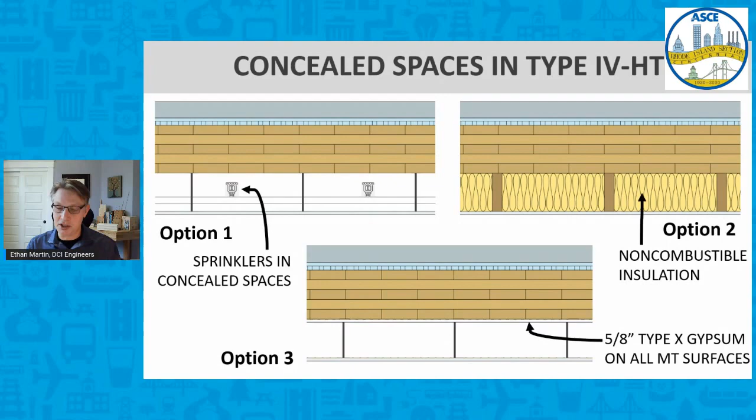On 90% of our projects we're working on right now, people are just slapping on a layer of gypsum. You got a drop ceiling in the bathroom, drop ceiling in the kitchen, just slap a layer of gypsum direct applied to the mass timber. That is one of the caveats. You can't have resilient channels, then this gypsum. This gypsum has to be direct applied to the mass timber. Again, if you had resilient channels in there, you'd have a cavity for oxygen. So the idea is to get rid of that oxygen in there so the fire can't combust.

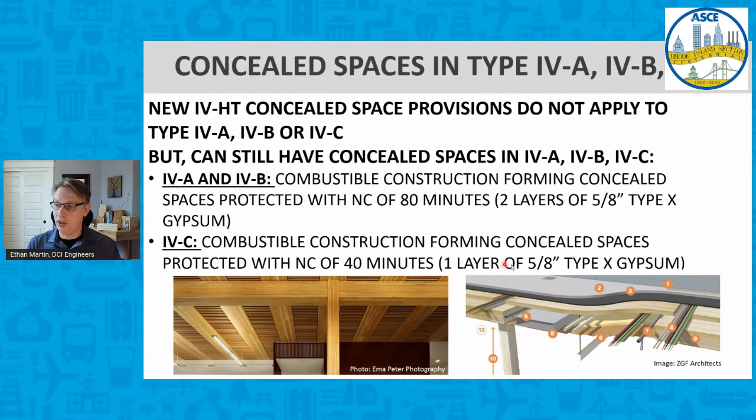And so the tall buildings, this is what they did. In the tall buildings, type 4A, 4B, 4C, basically you can do concealed spaces in 4A and 4B with 2 layers of 5/8 inch type X direct applied to the mass timber. And in 4C, you can have a concealed space if you put 1 layer of 5/8 inch type X gypsum direct applied.

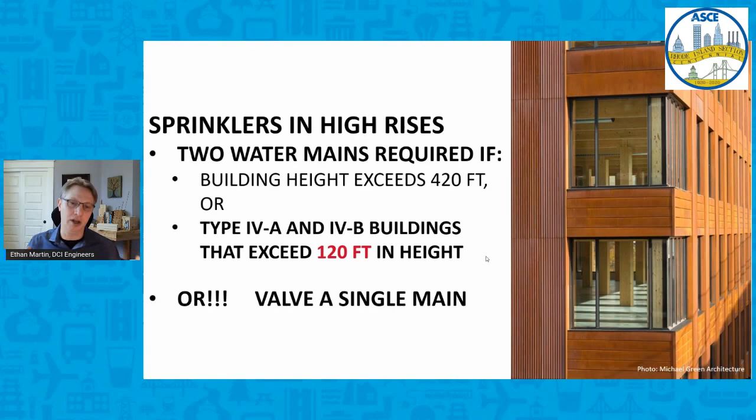And again, I talked about this. The high-rise sprinkler requirements kick in when you get over 120 feet. It means you have 2 water mains serving the building. And any GC that I've worked with that does high-rise, this has been nothing new to them. They're like, yeah, we do this all the time, what's the big deal? Or you valve a single main. We've got a project in Seattle right now where we're having to valve the single main. That way you can pressurize the system from one direction or the other direction if the water line breaks in the earthquake.

CLT char fall off. I don't know if that's happened in your region. That happened here with some of the tall mass timber buildings. Nothing to worry about anymore. This went on for almost about 2 years. But basically now all the manufacturers use a heat resistant adhesive in their product, and CLT char fall off is not an issue anymore. But if it comes up, just let me know.

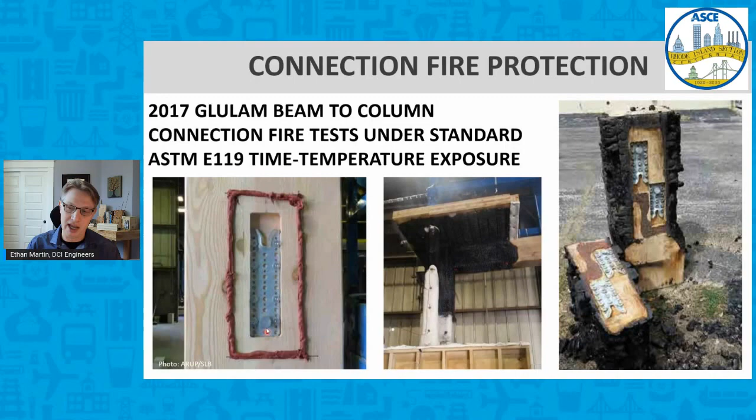And then connections, again, I mentioned this earlier. These are some of the connections we tested here for projects in Portland. And so again, you've got to keep these fasteners out of that heat affected zone. Otherwise, this fastener will start charring from the inside out. We're putting in a fire caulk here on these connections in the tall buildings. Again, this stops the hot gas from getting in there and heating up that metal connection.

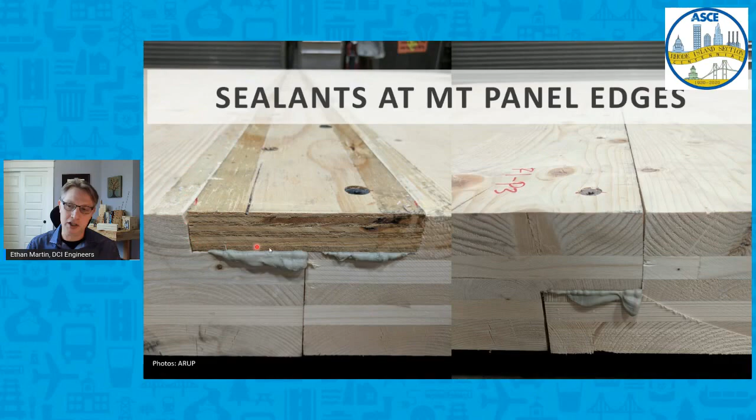So there's been lots of testing done on penetrations. Hilti's done an amazing amount of testing in there. Same thing here on these tall mass timber buildings. You have to put sealant at the panel edges. Again, what it's doing is stopping the hot gases from channeling up through these gaps and coming up to the next floor level. And this is what the IBC code says, that you have to put the sealant in here. The funny part is, or you can go with a proprietary manufacturer's tested assembly that did not use sealant, and then you do not have to use sealant.

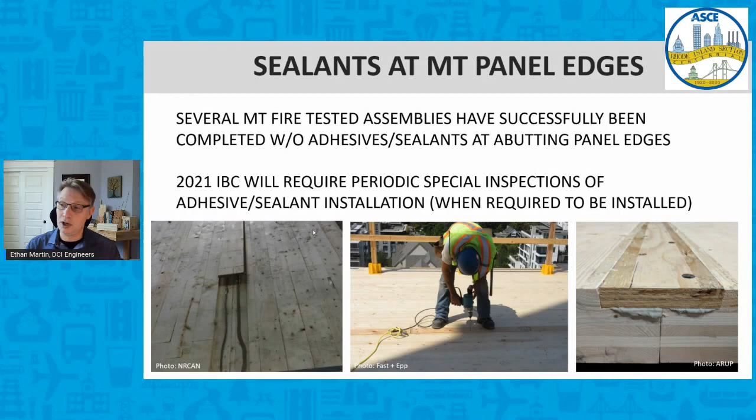But that puts you in bed with that proprietary manufacturer. And there are manufacturers that have gone out and tested these floor ceiling assemblies without sealant and passed the 2-hour test. So you start looking at a project, 18 stories, and it's like, wait, we can get rid of the sealant on 18 stories? That's money. But IBC, generic, prescriptive, you have to have sealant at the panel edges.

And then the other hiccup that happens if you're doing some of these tall buildings is there's some fire protection under construction. And this is a bit onerous, especially with rain, is the big hang up here. And basically what they've said is once you get to the 5th floor, when required by 602 or 604.2, you have to put a layer of gypsum on.

So if you're in a 4B, and your 4B says, hey, we've got 2 layers of gypsum on here for whatever reason, then once you get to this 5th floor, you've got to put at least 1 layer of gypsum on there. But you've still got this whole rest of the building to build, and it's raining. And so on one of our projects in Seattle right now, we're literally building a temporary roof every 4 floors to stop the water from getting into the building.

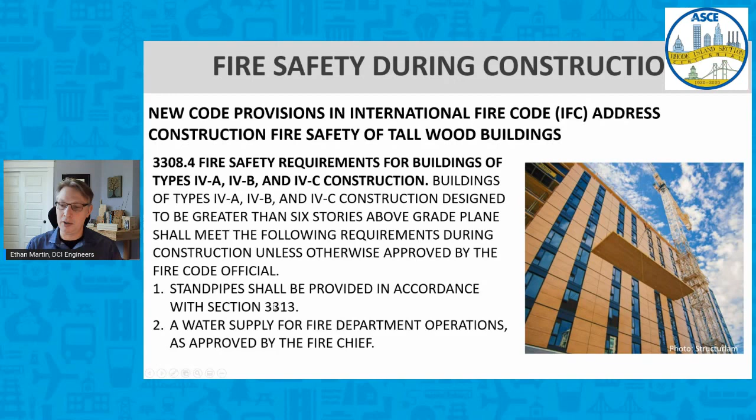So there are some fire protection under construction requirements. NFPA 241 is a good place to look for that, as well as IBC section 3313, IFC, the International Fire Code 3308 and 3313, or NFPA 241. All the requirements are in those sections for that. And that's that. So to answer a couple of questions that came in here,

there's a picture of the well-spaced forest, seemed to have trees all the same height. Does that mean that that area was clear cut? Yes, you are correct. That area was clear cut. And then it was actually 3 trees planted for every 1 tree they clear cut, but then they go and they thin the forest out. So that picture I showed earlier was right after they just finished thinning the forest out. Typically in the first 7 years time frame is when they would go and do that selective thinning.

And then there's a question, is wood a superior building material for colder climates like in New England? Would steel or concrete buildings fare better with heavy load of snow or not? I'd say it's a non-issue, as you stated. The beauty of the mass timber, one of the cool things about it, wood is an insulator. So if you want to do a cantilever, kind of like in this picture, we can actually cantilever these beams out

to pick up this awning out here, and you don't have to have a thermal break because the wood's an insulator. When you do steel, say you got a steel beam here, cantilevering out to pick up this awning, you should be putting in those neoprene decouplers there to stop the heat transfer of the steel going back into the structure. Whereas the mass timber can just go on out because it is an insulator.